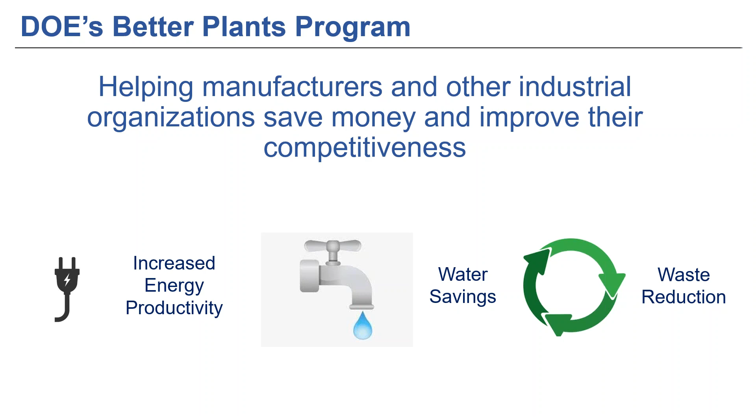So I think I'll take a few minutes now to walk through the Better Plants program in case you're not familiar with how Better Plants fits into the broader Better Buildings initiative. Essentially, Better Plants works with manufacturers and other industrial organizations to help them save money and improve their competitiveness through increased energy productivity, water savings, and our new waste reduction pilot.

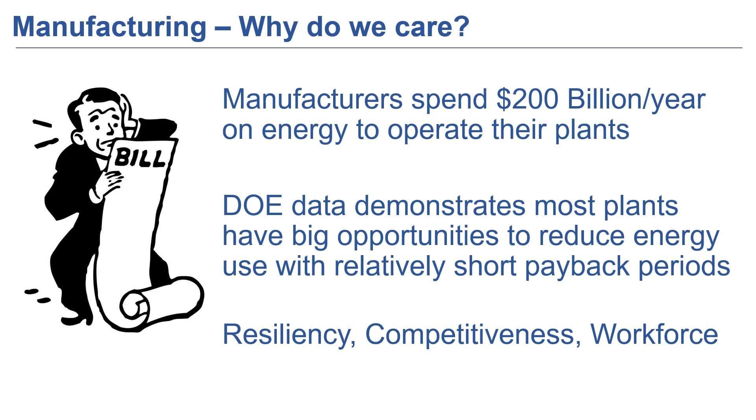Next slide. Why do we care? Manufacturers spend over $200 billion a year on energy to operate our plants, and Department of Energy data from our national labs demonstrates that most plants have big opportunities to reduce their energy use with relatively short payback periods, and we see this as really important for your resiliency, for your competitiveness, and for your workforce development. So we really have enjoyed the program, and let me tell you a little bit more about it on the next slide.

So how does it work? It's voluntary and it's no cost to participate. Partners set these long-term strategic goals, typically about 25% over 10 years, and then DOE works with you to achieve your goal. You're paired up with a technical account manager based through our national labs who can help you identify savings opportunities and determine the best plan of action to achieve your goal.

So throughout the program, we provide technical assistance and recognition, access to our national labs and innovation, and then the convening that comes from having 225 some odd partners, when we like to facilitate the sharing of best practices like we're doing today. So next slide.

Why partner with Better Plants? Consider partnering if energy is a significant part of your operating costs, you want or need technical assistance, networking with industry sector peers and industry experts is helpful, or you're looking for recognition. We really like helping to amplify your story and share your successes so other people can learn from it, but also to bring attention to the leadership you're showing.

So to start us off, let's hear from Blair Stern from Saint-Gobain with the compressed air competition they hosted. I was so excited to read about this. Saint-Gobain is doing so many fun and interesting things to engage their employees and make energy efficiency fun. So I'll turn this over to Blair to share his presentation.

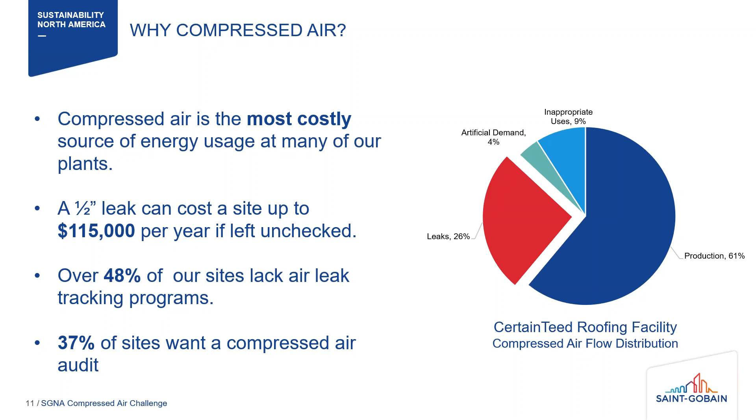So one of the many things we learned from that survey is that nearly all of our sites use compressed air, and probably many of your sites also. And in addition to that, a lot of those systems are rather old. We had almost a half of our sites that are relatively new, but 30 or 40% of those sites had systems that were nearly 15 years old or even older.

Many of those were looked at as needing to be replaced in the near future and getting to the end of their lifetime. In addition to this, we had many of those sites, nearly half of those sites, that didn't have formalized compressed air leak checking programs or doing regular audits. So we saw a great opportunity for establishing a program to go after those leaks.

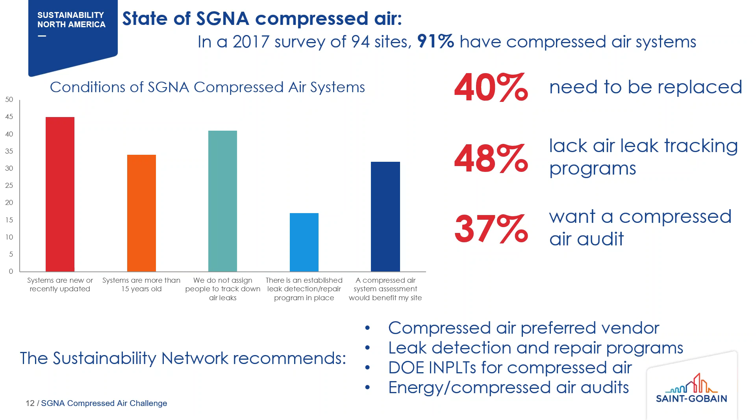Some of the suggestions that came out of our network were trying to find preferred vendors, implementing a leak detection and repair program, doing in-plant trainings through the DOE, which we also did. But one of the great ideas, if you could go to the next slide, was to make it fun, to have a compressed air challenge across our sites. At Saint-Gobain, we like to make things competitive. We like to make things fun.

So to establish this program, it was just a score point system of trying to find opportunities as well as to drive creativity. So we awarded points, as you can see, for naming creative team names and putting together photos or videos. We also wanted to institute continuous improvement type efforts. So we awarded sites that had recently completed audits or that had formalized programs.

But then we also had a scoring system for the leaks that were actually found, and we wanted to award both finding those leaks but also fixing those leaks. So as you can see, we gave a couple points for the leaks that are found, but additional points for those that are able to be fixed and resolved.

We also wanted to make it fun and creative and innovative, so we had some bonus points for sites that really took ownership of this and maybe created some of their own internal teams or gave out awards. So we wanted to award those as well. If you go to the next slide.

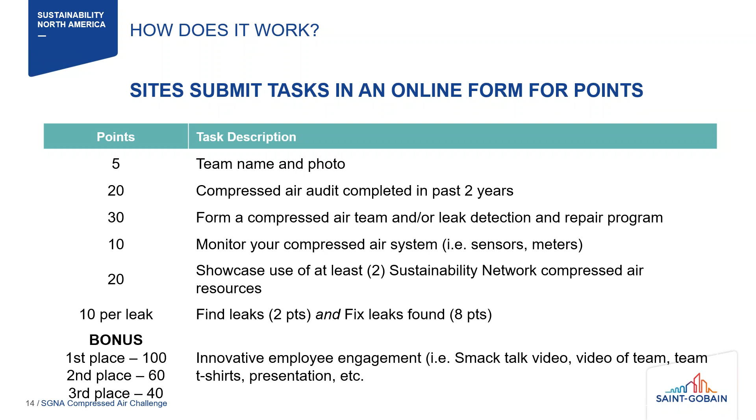So we communicated this out by setting up a tool for all of the sites to keep track of all of their leaks and submit those to us. And so this was the form that they were able to use to keep track of what's been identified, what's been resolved, to estimate those savings that we were able to track through this program.

And this was communicated out to all of our sites through the Sustainability Network, which has a number of different ways of communicating. But this was the tool that we built to communicate out. Go to the next slide, please.

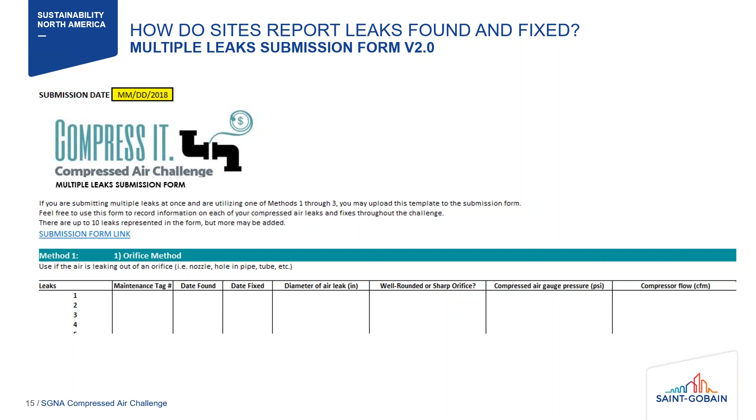As far as participation, we had 19 different sites participate in the challenge, and as you can see across our numerous businesses, we had good participation from a number of these businesses. So we saw quite a few sites that went ahead and scheduled compressed air audits, so that's a great result of this. A number of sites that also instituted their own tracking systems, as well as utilizing some of the resources that we have in our internal best practices tools.

We also hosted a webinar so that people within our network could understand the process, learn best practices, understand how to work on their compressed air challenges. And as you can see here, we even had folks from sites that weren't necessarily participating in the challenge, but still wanted to learn and grow in their program at their site, even if they weren't able to participate. Next slide, please.

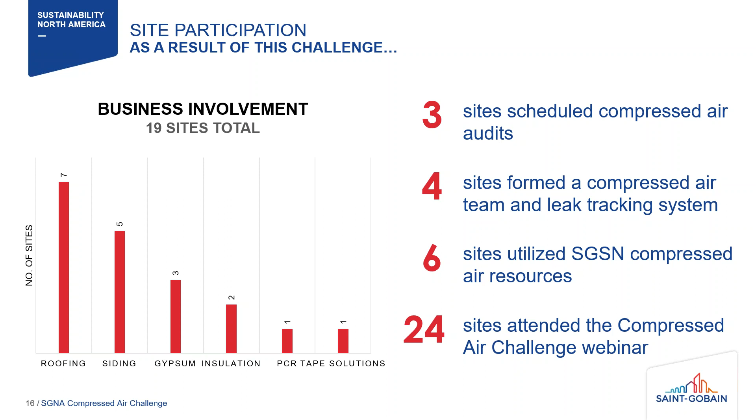So as I said, we wanted to continue to drive participation throughout this period. So in addition to the final competition at the end by points, we also wanted to continue to push the initiative throughout. So we had different awards throughout that time period, early on just around having creative names and submitting photos, and then just getting things moving with finding your first few leaks and getting those resolved.

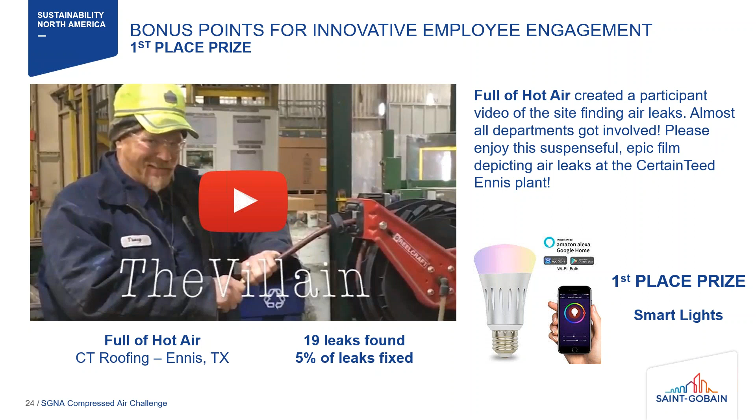Next slide, please. So in addition to these huge sites that have great opportunity and plenty of leaks, we also wanted to award some of our smaller sites that may not have as many opportunities for leaks to be resolved. So we had those different bonus points, and this site here in Texas was very creative and created a little YouTube video to both drive the competitive spirit but also make it fun. So you see there that they were also included in our awards. So a real neat way of driving best practices, finding opportunities for energy savings, but also making it fun and competitive across our sites. Next slide, please.

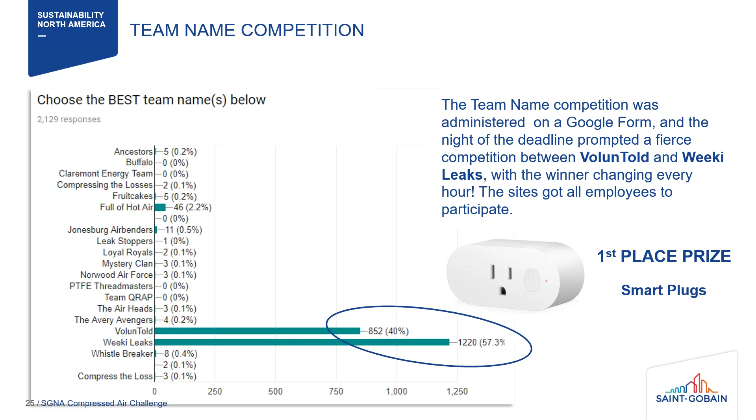And so we also had a team name competition that again came up into the final hours. We put this to a vote, so any of the sites that were participating in our competition were able to vote on their favorite team names. So you can go down the list there and see a lot of fun ones. Voluntold, probably a common term in many of our corporate environments, and Weeki Leaks. They were voting up until those last hours to see who was going to be the final first place winner for the most creative name. Next slide, please.

And so, what's the whole picture here? So you saw on an early slide, we were able to find significant energy savings and financial savings through just having this fun competition. All told, we found over 800 leaks and were able to fix almost half of those, even fixing many of the more significant leaks here. So a great way to find relatively easy savings, or at least relatively low cost, just buying a bunch of awards and spending some time tracking these. We were able to achieve significant savings across the 19 sites that participated, getting roughly 5% of their energy spend at those sites. And at the corporate level, getting $2.5 million in potential savings for those leaks is pretty significant achievements for a fun competition. Next slide, please.

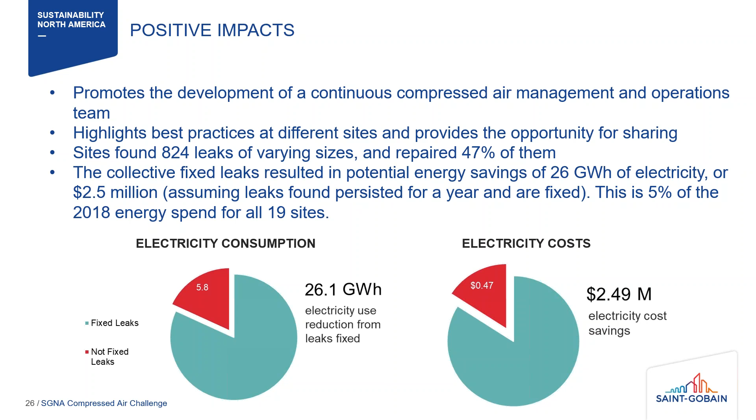So I guess, what advice would I give to those that are thinking about something like this? We're already starting to work on the next stage of this competition for this year. So more to come, hopefully, in future DOE events. But the advice would be to keep it fun, make it competitive across your sites, find opportunities to drive improvement and best practices in fun environments like this compressed air challenge. Utilize the resources that are out there. We used a number of DOE resources, but there's plenty of good resources out there.

And it also helped to institutionalize a lot of this. As you saw, a number of sites had audits of their compressed air systems or instituted leak detection programs. So the hope here is that it's not just a one-off, that we're instituting a program that continues on, and there's continuous improvement of those leaks as those pop back up throughout the years. But a great way to get energy savings with a quick little competition. And as you saw there, not insignificant savings that we were able to achieve in these few months of fun competition. So that's an overview of our program.

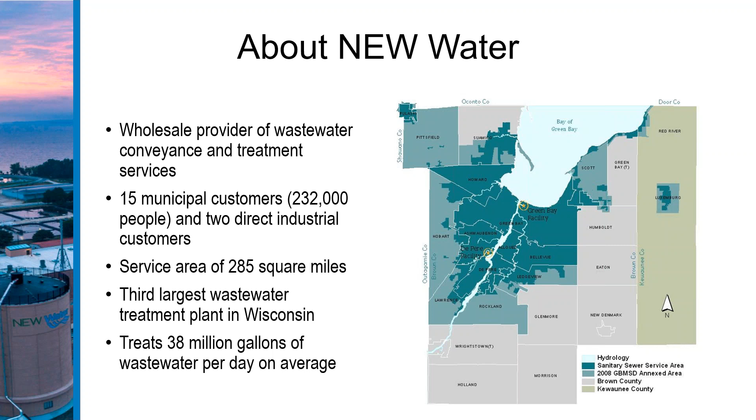So the R2E2 project, this is the architectural rendition of the building and the digesters that we put in. It was our most cost-effective solution to replace our solids handling at the Green Bay facility. And also, it's a shift in how we look at wastewater. It's been a shift in our industry probably over the last 10 years, that instead of just being a place that disposes of whatever is sent to us, we want to treat everything that comes to us as a resource and to recover whatever we can from that resource. Next slide.

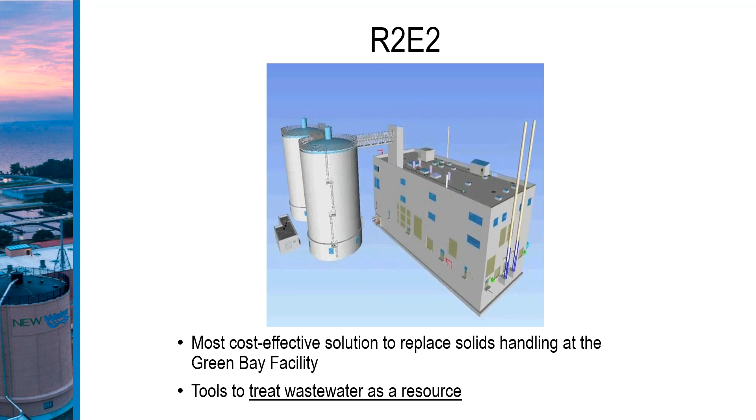We had to meet environmental regulations from the EPA. They came out with more stringent air regulations in March of 2011, and we had to meet those by March of 2016. So we had to meet those regulations, and then we had to increase our capacity needs. Green Bay and De Pere used to be two separate wastewater treatment facilities. When we merged the two facilities, we were operating at 90% capacity, so we had to increase our capacity in order to continue to serve the communities that we do serve. Next slide.

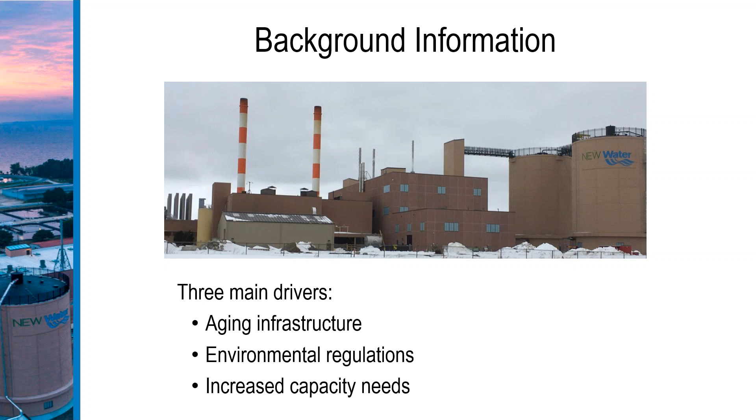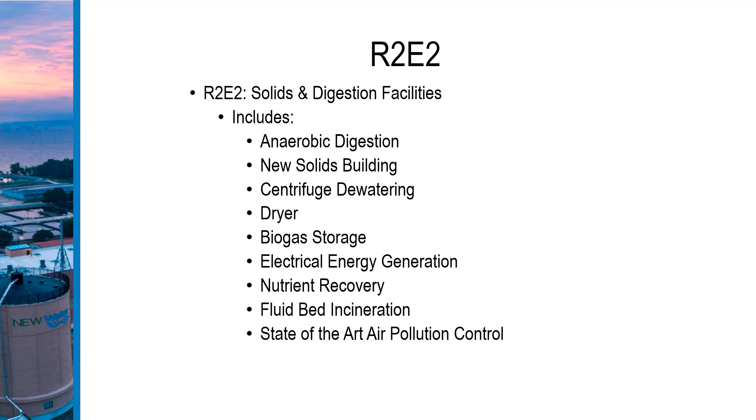So what is included in our R2E2 project? We had an anaerobic digestion, a new solids building, dewatering of the biosolids with centrifuge, a dryer, biogas storage. We also generate electricity on our own. Nutrient recovery system was added. We do not have that up online yet. That is still undergoing commissioning. And then we put in a new fluid bed incineration and then a state-of-the-art air pollution control technology to go with the new incinerator. Next slide.

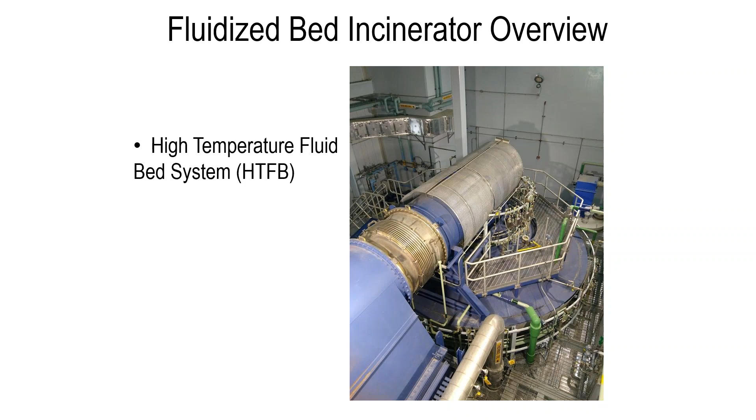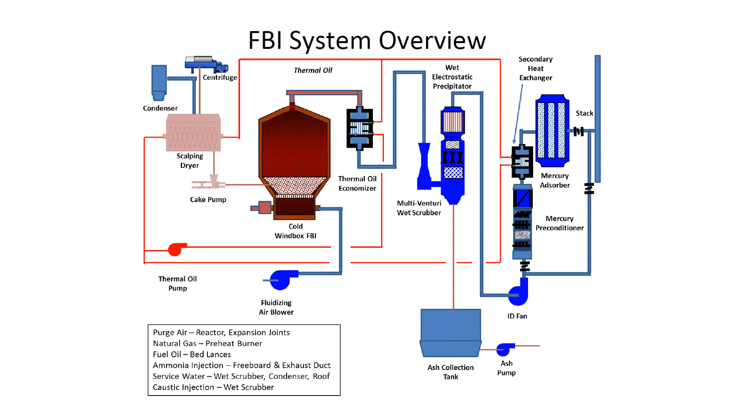And we also have high-strength waste that we can receive. So high-strength waste is like a dairy waste, a sugar waste, glycol from the de-icing fluid at the airport. It's all good stuff that we can feed our digesters. And really what it does, it gives the bacteria in those digesters, it basically puts them on a sugar rush, and they actually will increase the biogas by the high-strength waste that we put in. Next slide.

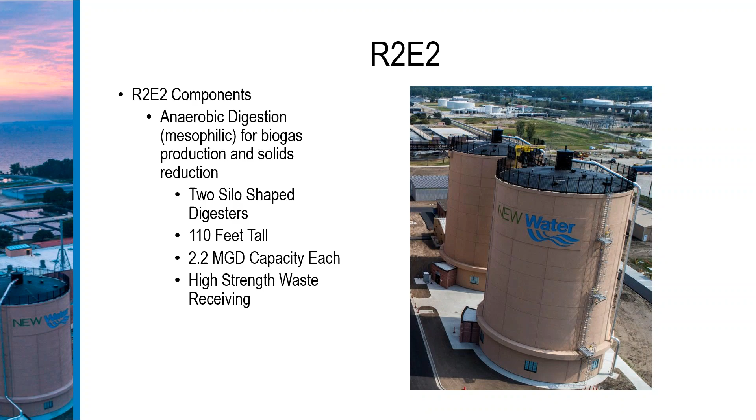Just another view of the digesters. They are 110 feet tall. Most of it is above ground, but there is probably a good 50 feet that is below ground. Next slide.

So the energy recovery is part of the project for R2E2. We produce enough biogas to run two 2.0 megawatt internal combustion engines. We capture the heat from the engines, and we use that to heat the digesters to the 95, 96 degrees. We take the heat recovery from the fluid bed incinerator, and we use that through a thermal oil system to run the dryer. And then we have autogenous incinerator operation, which means we do not use any auxiliary fuel. The previous incinerators, we were using quite a bit of natural gas.

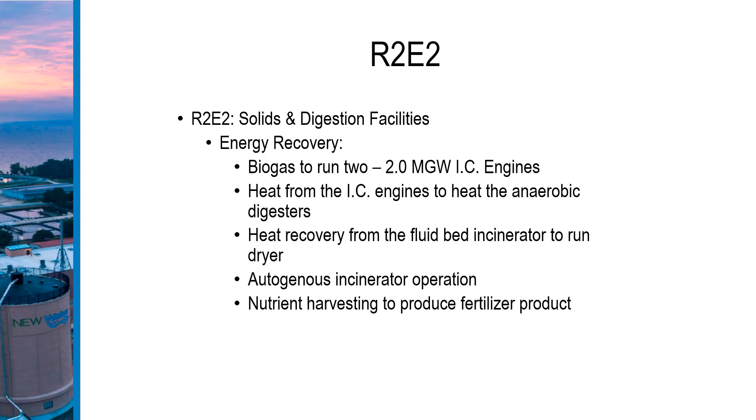So the benefits of the project, it really addressed the original project drivers. We had that aging infrastructure. We've taken care of that. We have done testing of our air emissions, and we are within the regulations. We also have increased our capacity needs.

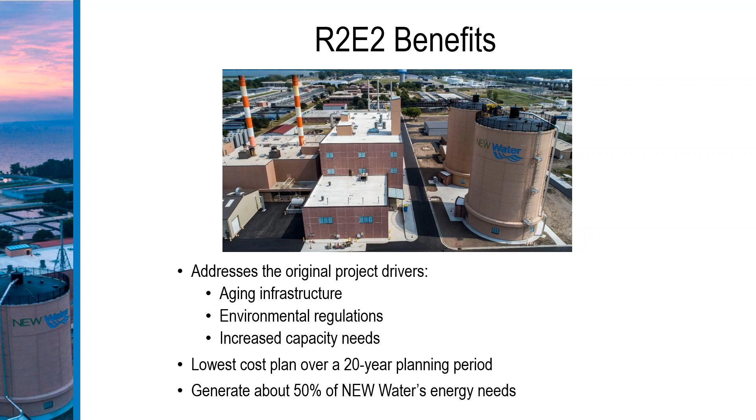When we looked at this project, we started out looking at 72 different technologies that we could use, and this plan here turned out to be the lowest cost plan over a 20-year planning period, and we hope to eventually get to about 50% of generating our energy needs at our Green Bay facility on site instead of coming off the grid. Next slide, please.

So this is our energy data. So in November of 2018 is when we started producing biogas, had the digesters started up, and then also had one of our IC engines running. So we had purchased about 93%, and had only generated about 7%.

And then if you look to October and November of this past year, we purchased about 60% in October, generated about 40%, utilized about 86% of our biogas. And then in November, we purchased a little bit less and generated more and utilized about 75% of our biogas.

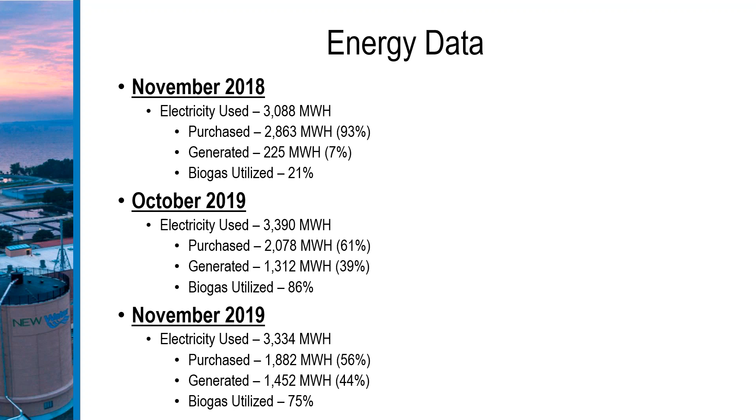So that is pretty typical of where we're running, where we're generating between 40 and 45% of our energy needs, not quite to the 50%, which is the eventual goal that we're striving to get to. Next slide.

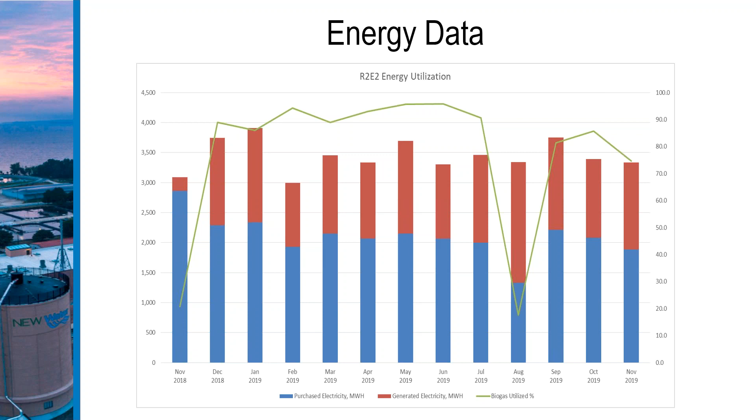This is just a visual graph of our purchased electricity, our generated electricity, and then the biogas use. So the blue part is what we have purchased from November of 2018 on to November of this past year. And then the red or the orange is what we generated on site. And then the biogas utilized is the green line, the percent that we have utilized. Next slide.

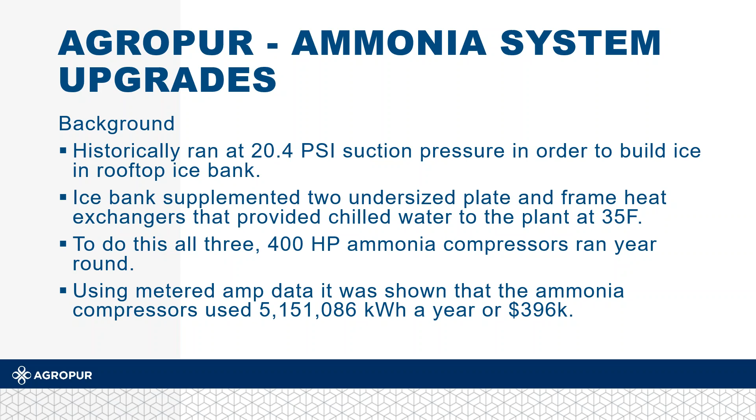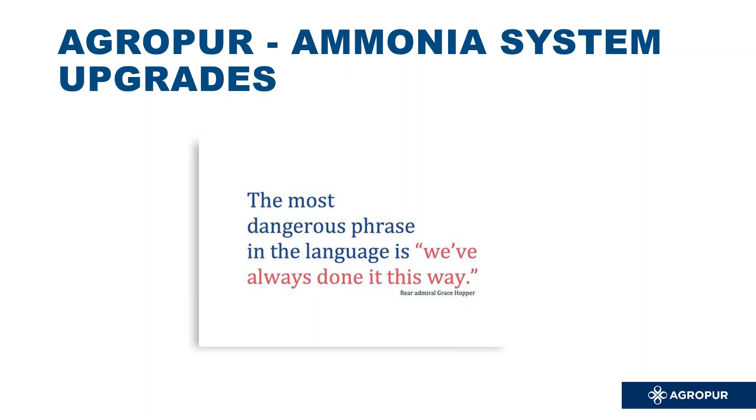So when I go into our plants and do energy audits, we do energy audits at all our plants, one of the most common things I hear is, well, that's the way we've always done it. We've always had a 20 psi suction pressure. But there's better. We have proven at other plants that we don't need that. So what was the limiting factor here, or the reason? So next slide, please.

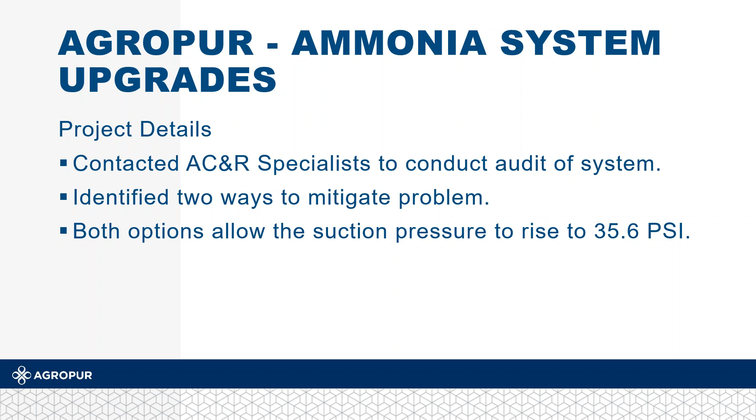We contacted AC&R Specialists to conduct a very thorough audit of the system. They identified 2 ways that they thought they could mitigate the problem. Both of the options they gave us would allow us to raise our suction pressure to 35.6 psi. And for those who don't know, the difference between the suction pressure and the discharge pressure is what we call the lift, and reducing the lift reduces energy consumption. And then importantly, it also increases the capacity, so you can get more cooling out of each compressor. So the 2 options they gave us, next slide, please.

We weren't really using the ice bank for the main purpose it was designed for. But anyway, that would have required us to install a heat exchanger inside our facility where we didn't really have room, where the ice bank was on the roof. So that option wasn't really going to work. So next slide, please.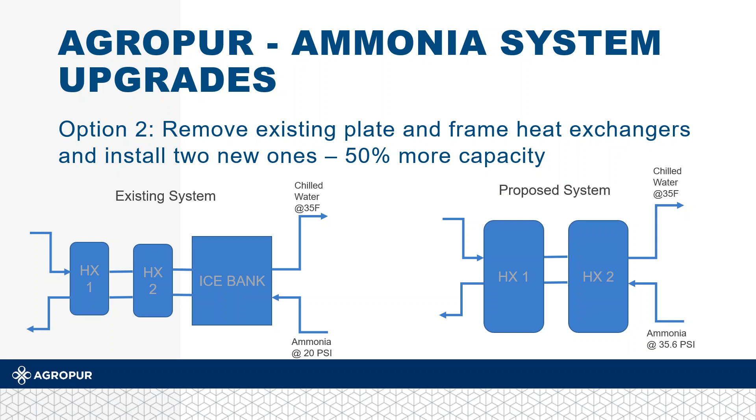As I said, we were limited on space. We had to remove the ice bank, and we're in Le Sueur. It's a small town, and we're right on the main road here, so that requires getting a crane, shutting down Main Street. It could be for up to a day to do that. We also needed to increase the pipe size to the heat exchangers, which just adds costs and things.

Then we also had to come up with a way to show savings, because everything we do, I have to show what the payback would be. And then that ultimately has to go up in front of my manager and get approved. So what I did, I used the Vilter Screw Pro software, and I tried to be very conservative, where I estimated roughly 1 million kilowatt hours saved. I plugged in several different scenarios, because here suction pressure would stay the same, but discharge pressure varies throughout the year, because we do float our head pressure.

And then I had to contact the utility because we wanted some rebate dollars. And on a project this size, you need pre-approval, or else, here anyway, we'd probably get denied. So we went through all that, got the project approved through our managers. Next slide.

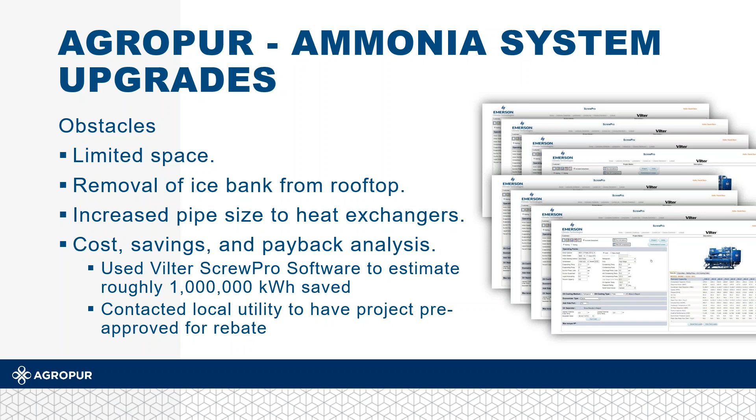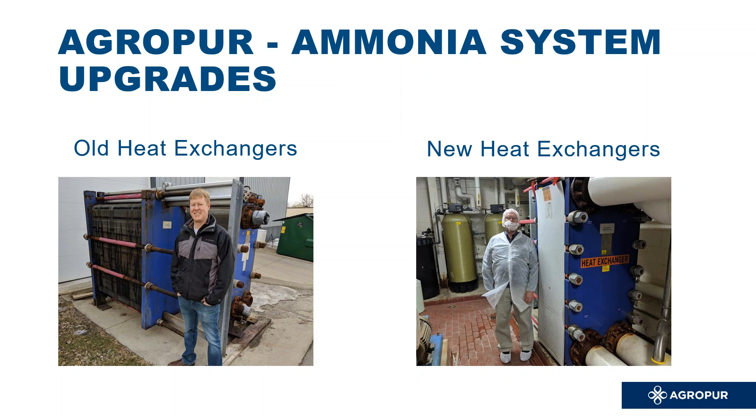Here I'm trying to show the old heat exchangers on the left. They're smaller. You can see they're dirty and everything. The new ones on the right there, they're much larger. It's kind of hard to tell on that, but you can see we're really limited on space. Not a lot of space inside our facility, so we were a little unsure at first whether they would fit or not, but they did ultimately. And then next slide.

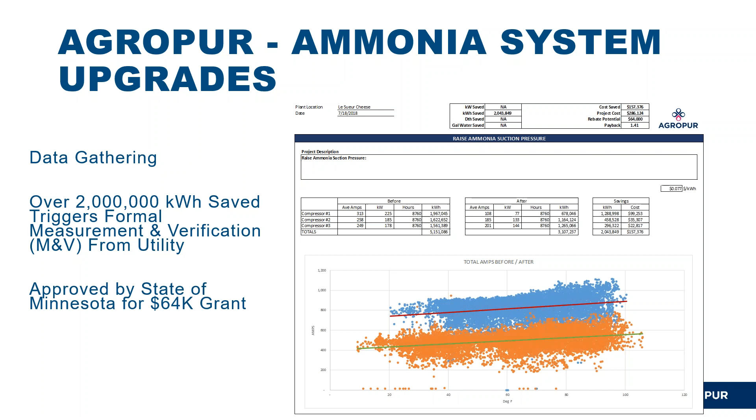Now you might have to click a few times. It looks like not all the lines got added here, but we started gathering some data. And for me, this is what I like to see. So the blue dots are the total amps on the system before. The red line is the average. And then after we did the project, the total amps on the ammonia system is in the orange dots. So you can see our average really dropped a lot, and that was throughout all different temperatures. We actually measured it for like 6 or 8 months, and that's the data we got.

It showed, or we could prove, because we had it all logged, that we were over 2 million kilowatt hours saved, which then triggered a formal measurement verification from our utility. But luckily we had all this data, so I just sent it to the state. They reviewed my calculations, the data, did a few spot checks, and ultimately we did get approved for a $64,000 grant or rebate through our local utility here.

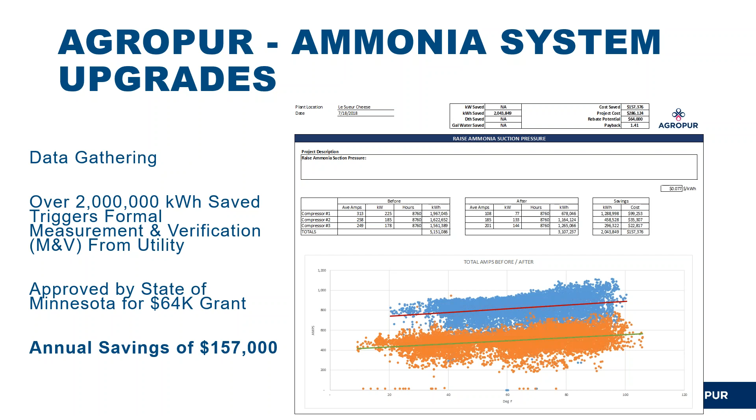And then most importantly, on top of all that, we are saving $157,000 a year. And that's something that happens every year. You get your rebate one time, but the annual savings are what really can be huge. Next slide.

So the next steps we're doing is we're going around gathering data at all our other plants. This can be easy at some, hard at others where we don't have the trends and logs. So we're getting those installed and trying to get some of that up and running. Our one plant in Jerome, Idaho, we did do a test run. We're still doing it actually, where we raised our suction pressure by 10 psi, and we're trying to see what kind of savings we can get there. Right now, we're showing pretty good savings at that plant.

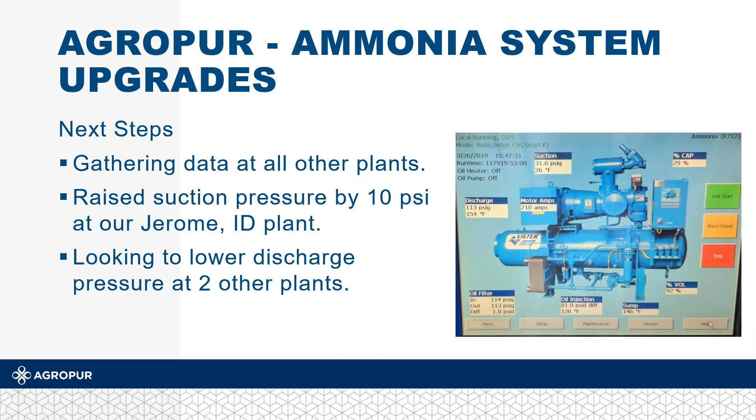Two of our other plants, we're looking to lower the discharge pressure. And again, that will also reduce the lift, which reduces energy. So we're trying to find ways to do all this at our other plants and make our ammonia refrigeration system as efficient as possible. I think that's it for me.

Sorry. Thanks, Mark. That's great.

I find it so interesting, just as an aside in the program, working with folks from industry from so many different sectors who are working on all of their challenges and really showing great leadership, but working in so many different ways, and that so much of what they are working on hopefully can be replicated, or at least the lessons can be shared across our program.